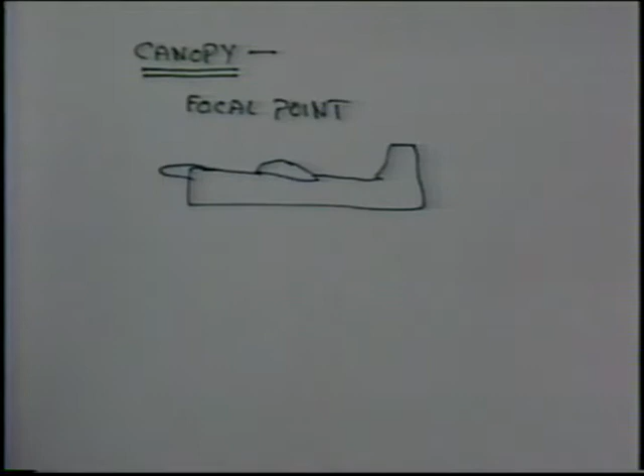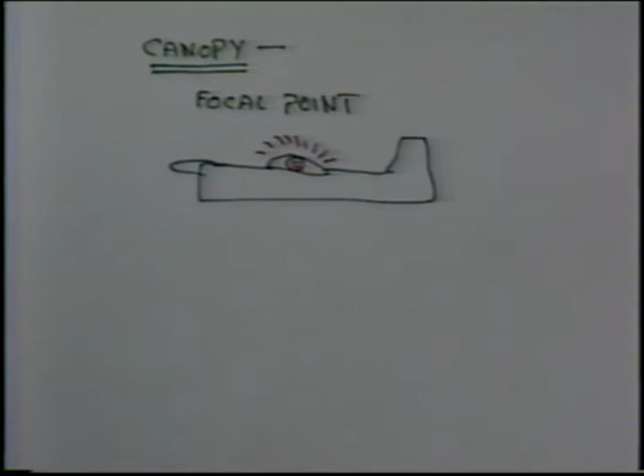What a canopy really is, and this is a very important concept to understand, is a focal point. What generally happens is you have this model, and of course it's the Plebinski special, and somebody goes to look at it, and the first thing they see - they look at your new model, boom, boom, boom, boom. Wow, look at that canopy, look at that pilot, look at that seat or stick or whatever it is. It's always important. It's a focal point.

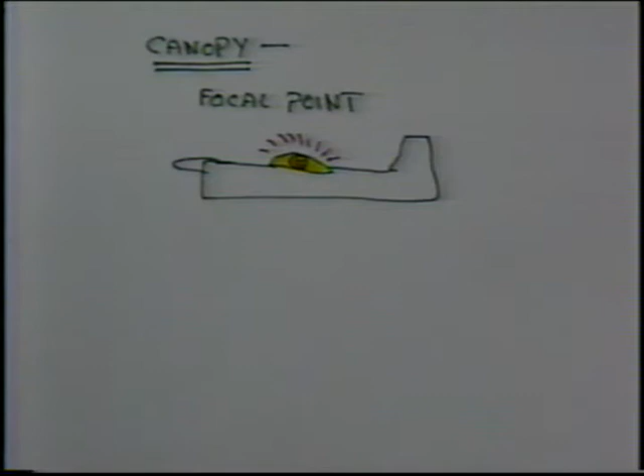Now, if you understand it's a focal point, what that means is you want to put more than the average amount of time and energy and effort into making it look pretty. Sure, there's other things, but a canopy is a focal point.

Now, in the old sweeper days, I'll just make this real rough. One of the things that was always important, at least I always thought was important, was that forward jet canopy. Boy, did that always get people looking and wondering how you did it. But what I always did was I carved off the top block, and of course I didn't have video back then, so I didn't document any of this. But I did mention it in the article I wrote in 1968 - how I got all that canopy detail in there.

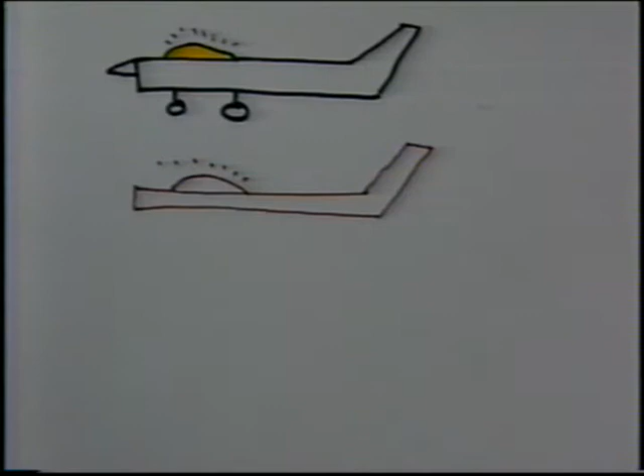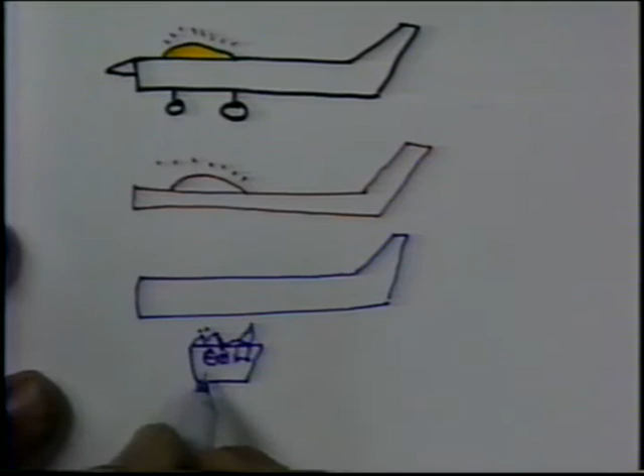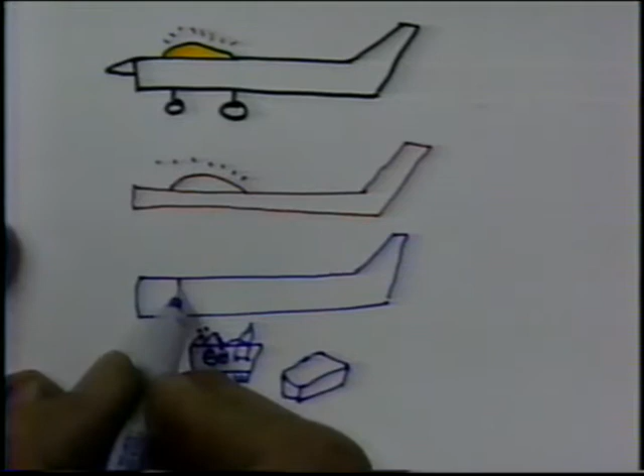To backstep one more step here - I had the top block and the rudder on it, and you've seen that already on this set of videos. What I did is I made the whole canopy in a box. And then I took this little box and I had all the wheels and dials, and a seat was in there, and a stick, and a bird cage, and some naked women, and all kinds of stuff. If you looked at it from the top, it was a little box, just like a little matchbook box. And then what I did, I carefully cut this out, took that box, sunk that box right in, so now it was part of this, and then of course installed the clear plastic part of the canopy.

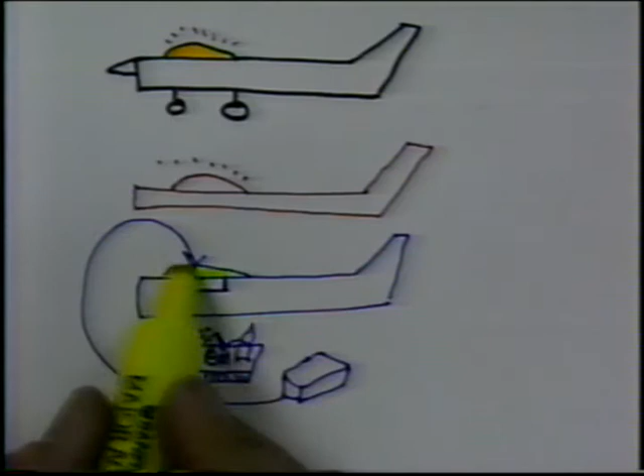Now that's just one way. Obviously there's other ways, but the way I think I'm going to choose to do this is carefully measure out for the box.

If you make this box, you then somewhere down the road will have - and I just want to do this off camera - some amount of instruments, and these are available from a million different sources, whatever the instruments of choice. Tatone makes them, several other companies. It's a good idea if you're not a real pilot, take a look at a real airplane and see just what a dashboard looks like.

There's usually pedals in the bottom. There's usually a stick or a wheel, and a toothpick makes a nice stick or a wheel. The bottom of this, the floor, is always of a non-slip material. In our case, what I used in the Red Baron, is 80 grit red sandpaper for the floor - it's a maroon kind of sandpaper. And there's several other ideas here. You can use the sides, make light ply out of the sides, and put lightening holes in them. That always kind of looks realistic.

A throttle quadrant will usually look something like this, and you can make this out of a piece of 1/8 inch balsa. Have a pinhead sticking up with a throttle on it, and that usually would be on this side. Well, it really doesn't matter - each airplane can be different where it has its instruments and stuff.

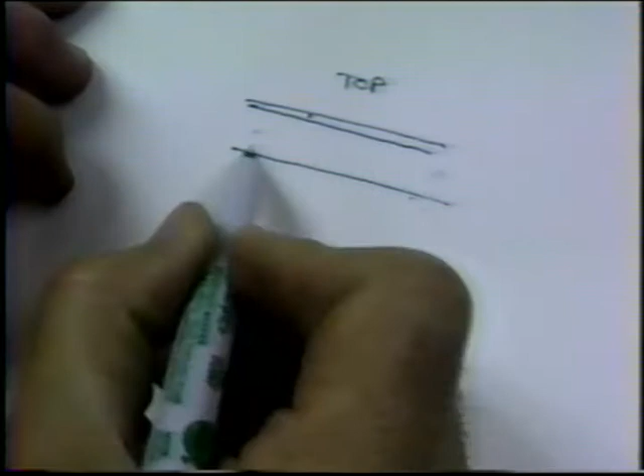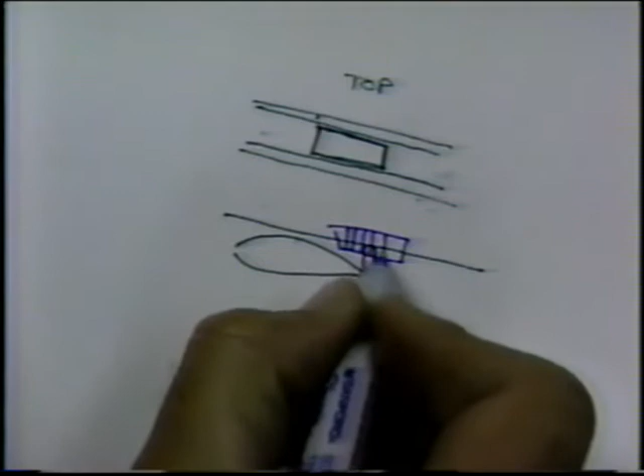Now here's just some of the ways you can get yourself trapped. You want to measure the top, wherever. If this is a forward canopy or rear canopy, measure inside the fuse sides, and you want this box to be a little bit thinner. Make sure if it's a midsection going over the wing, and your horn is here at the fuse side, you don't want to put the canopy down here and then after you put it in the body, the horn or the push rod bonks right into it.

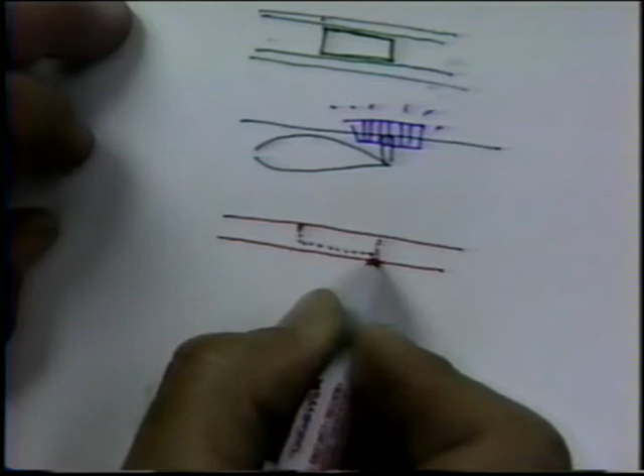So a safe way of doing this, I call it a safe way, is I lay the top block right on the table so that nothing sticks below when it's laying flat. I measure side to side, top to bottom, and get a dimension to make my little box in, and try to get that done ahead of time. So from the top view, it'll appear like this.

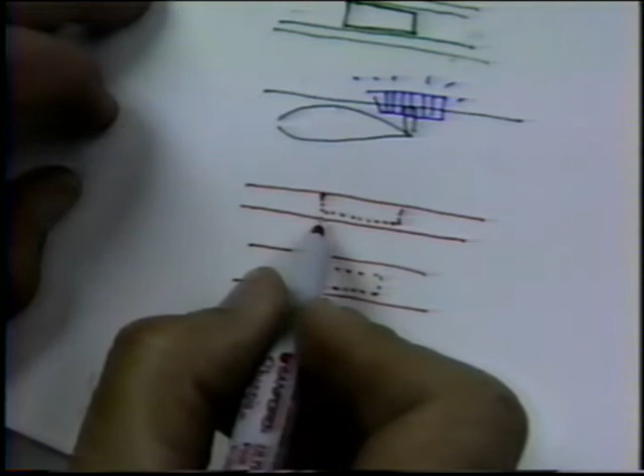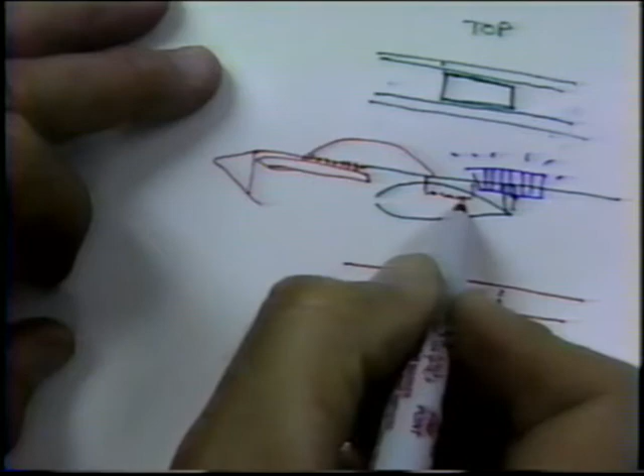From the side view, it doesn't stick down into the airplane, and either it runs into the wing or the horn - and I've made things that ran into the wing. Well, you can't cut the wing out, you can't cut the horn. The only one you're really safe on is if you do a sweeper kind of thing. The motor mounts are up here, and you can use the motor mounts as part of the canopy. The quadrants and stuff can be up here. But back here, you've got to be aware that you could run into the wing or the push rod. In this case, we want to figure this all out ahead of time - it makes it a lot easier if you do all this research ahead of time.

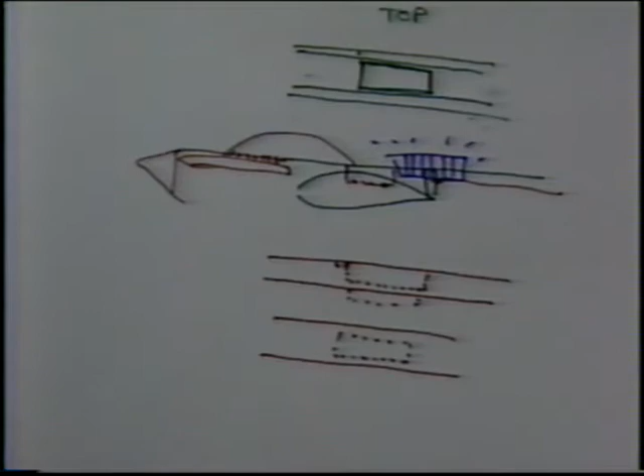The most common problem of people making their first canopy, some kind of bubble canopy, is they make the box either in the plane or off the plane. One of the biggest problems you can have is this whole area can be sealed. The canopy is obviously a sealed unit, and this joint along the fuse is sealed. If you seal this whole thing and make it airtight, what's going to happen? On a cloudy day it's going to get all moisture - you've seen this, it looks like the inside of a beer bottle. It looks terrible, and as it condenses it's going to look even worse. You put it out in the sun, it's going to expand and shrink, expand and shrink.

What I always do - if you leave a hole in the bottom of the canopy, let's say you leave a hole here, well, you're going to have what Paul Walker had one year: all of the dust and chips from inside the plane work their way up, and the pilot's going to look like he's been choking on cocaine.

Now what you really want to have, and this is a well thought out thing, is a hole somewhere so this is not a sealed unit. Down inside the plane, a hole, but covered with a piece of coffee filter. From the bottom view, you have a hole and a penny-sized piece of coffee filter under the seat so that air can get in and air can get out, but it's filtered as it goes in and out.

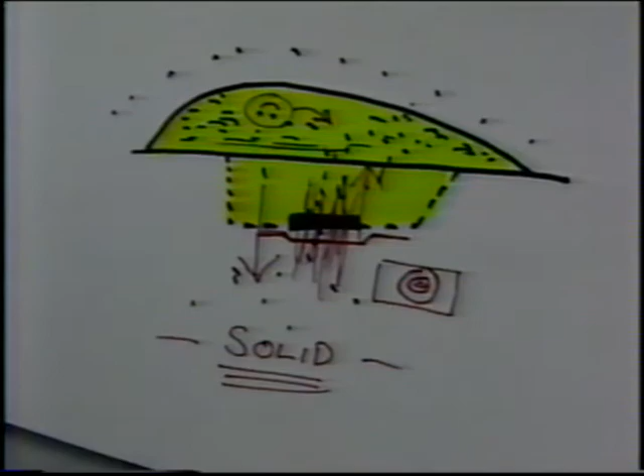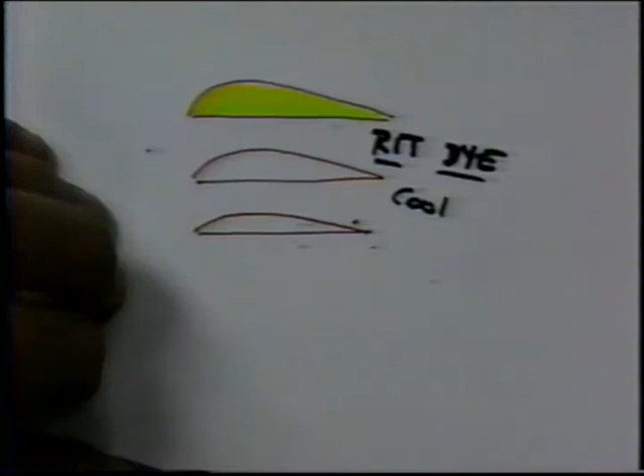Just for your own information, you may order these SIG canopies - they come all different sizes and heights. You get the one that you want, whatever. Now what you may choose to do is tint them - you can make any color of tint. What you do is go and get RIT dye, the ordinary dye that comes in a box, that we dye the hinges with and whatever. Boil the water, let it cool off, maybe for 15-20 minutes - it needs to be a little lower than boiling.

If you boil it, this canopy is going to shrivel up like an old woman's pocketbook. What you want to have is a little lower than boiling.

Dip it in. Now what you do is you have those scraps - you know, the canopy comes on a piece. Take a piece of this scrap, or buy two canopies, and you have this boiling water, a little lower than boiling. Submerge the whole canopy in there. Leave it in for about a minute.

Take it out, it'll be a certain color, whatever color that is. Put it in for another minute, it'll get darker. Almost infinitely, it'll keep getting darker. The problem is, at some point in time, you can't see your canopy details, and it all disappears and you did everything for nothing.

If in doubt, leave it a little lighter than you expect to use. If it's a little bit lighter, it'll always be better than if it's a little bit darker. Lighter is better.

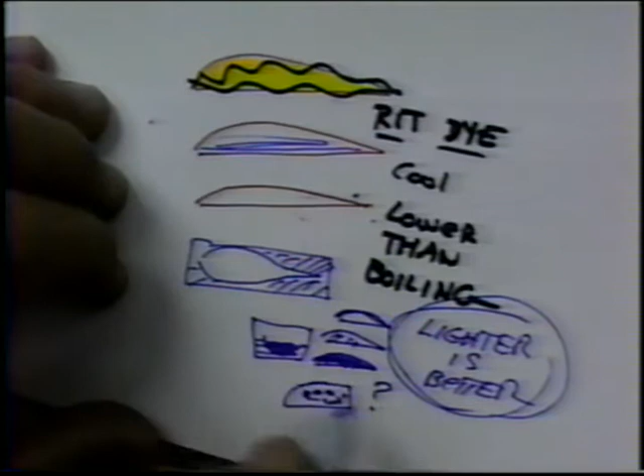And when you take it out in the sun, don't forget you're going to be looking through one side of the canopy and out the other, so it'll automatically be darker than it is when you look through one side. And then you'll still be able to see your instruments.

Dave Midgley has a lot of canopy molds. He has molds for Noblers and different planes that you can't buy the canopy for anymore. If you need a special canopy, give Dave a call. If not, one of the sources is SIG.

And obviously one of the things I did, just for ideas you can use, is Byron. Byron Models makes these big giant scale things. Now what I did is I bought the big giant canopy that belongs on an F-16. This canopy was about - boy, I don't even remember - it was just half the size of the fuselage.

And I cut it down so I only used this top part on my F-16, and then I went and put a lot of details in it. But that canopy was about a 32nd of an inch thick. It really was beautiful, it cut down real nice. But that's another source of canopies, or kits.

Like a chipmunk kit, you can get that canopy that looks like a chipmunk. Whatever that, a Mustang - they have P-51 canopies if you're doing the Warbird kind of a Mustang. Bearcats - they have a Bearcat canopy that's kind of cool.

So if you're going to put all this time and energy into a canopy, you want to research out all these possibilities, so you come up with something that you're really going to impress your friends and neighbors with.

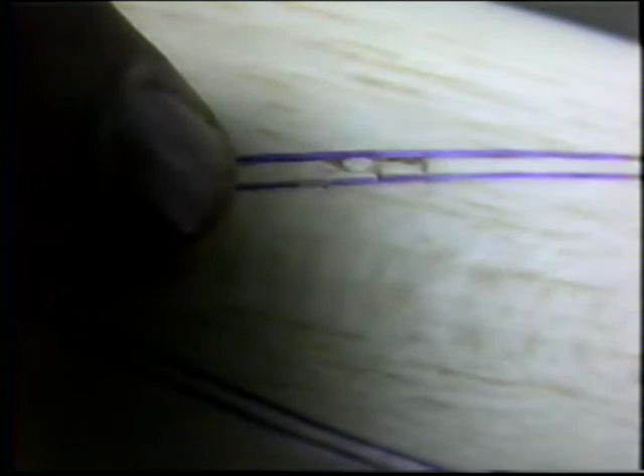Now with that cut, the next trick is I'm just going to cut little notches here and pick out one piece at a time. Cut myself a notch, pick a little piece out. Let me show this on the macro lens. If you just cut a little notch, maybe a quarter of an inch, and pick that piece out, cut a quarter, pick it out, pick it out, and just go right down. A quarter inch piece at a time is just about right, and you'll have a nice ditch when you're finished.

Now with that channel carved, take a piece of 220 sandpaper, fold it up, and be real careful you don't go through. As soon as I finish carving this, I'm going to take the top block off and go underneath to harden up all the wood around this ditch with CA, so that canopy is sitting in nice hardwood. You wouldn't want to do that before you carve. Make sure you have a nice tight fit on the canopy.

You can see a couple of pinhole spots where I've gone through, but it won't be a problem. That's what the captain of the Titanic said, don't worry. Anyway, we will get that nice ditch carved in there, just a couple more swipes.

Now you want to make it big enough because we're going to try to attach this with epoxy. I don't like CA, it leaves a cloudy film on the inside of the canopy. Epoxy doesn't. When it comes time to attach it, that'll be far down the road.

Now you also want to check every step of the way that you're not making a banana out of the block. So lay it down on the table flat, see that you have a decent chance of getting it nice and flat, and that you haven't spread that open or concaved it in.

Not only do you want a permanent joint here, but I really want to have a radius of thick CA here too. I really don't want this getting loosened up. I mean, Gene Schaefer had a pilot that the head came off halfway through a season. Some other embarrassing things can happen. Enough embarrassing things happen in this hobby, you don't have to add any to them.

So I'll put a nice bead of thick CA, then we're going to flip this over and plot out where the actual cavity for the canopy will be. Remember, every step of the way here we want to seal this too. We not only want to have it strong, I don't want to have little holes where dust can get through and all that other nonsense.

And what I want to do is look at the bottom and kind of roll it over and plot where that floor starts and ends. I can just put some light marks here, cut the hole a little bit on the small side and then work it up to the big side.

I know I have the floor from there to there, so I'll kind of cut this on the small side, leave a little bit of extra room around the edge, and then pretty much just connect the dots here. And I'll be ready to start building my box.

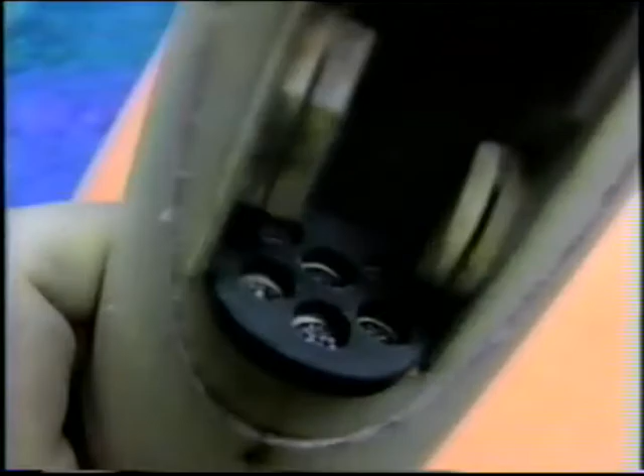But of course, always give this a shot - put the old canopy on and just see how you like it. Yeah, so far so good.

Now there's a lot of materials you can use to make seat belts out of. One thing that seems to work real good is 1200 sandpaper folded over. What I do, I fold it over, get some CA along the edge, get it on there with the Q-tips. That tends to get some dust in there and kick it off. Fold it over. Now this way you have the texture on both sides, and you can just press it down underneath a piece of plywood till it dries.

Now after that kicks off, I trace out the seat roughly 1/8 of an inch thinner than the seat, and I can get the harness belts all in one cut here, all in one piece of paper. Now with the harness and everything ready, this piece you can just fold back and tack glue it in place. That gives you that nice edge right there.

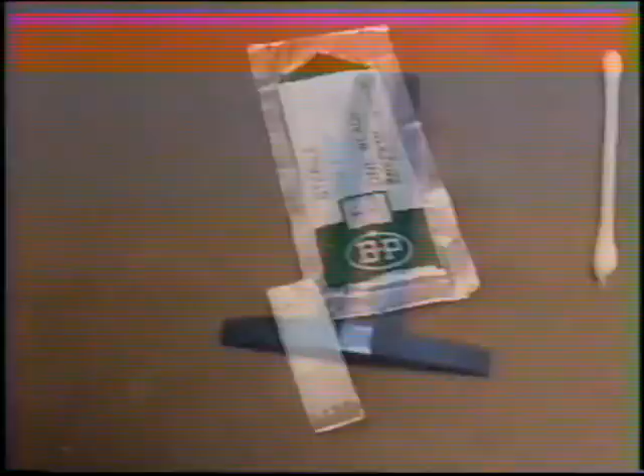See how realistic that looks as a seat belt buckle - it's just a little piece that goes around and around. There's nothing crazy about it. Then in the back, just drop a CA and hold it.

Again, we get this nice variety of texture where we have some shiny stuff and some dull. The seat belt actually is dull - if you were going to use material, you wouldn't want to use shiny material. Everything inside a cockpit is usually dull.

All you do here is lay the material flat on a table, take some Q-tips, and rub it flat. Then cut it into thin strips - the scissor is just perfect for this.

You can see I'm just wrapping this around, and each time you wrap it, it gets a little thicker than the material behind it. It adds another three-dimensional look. What we're trying for is a lot of little three-dimensional things that'll catch your eye - some sparkle, some shine, not everything exactly the same.

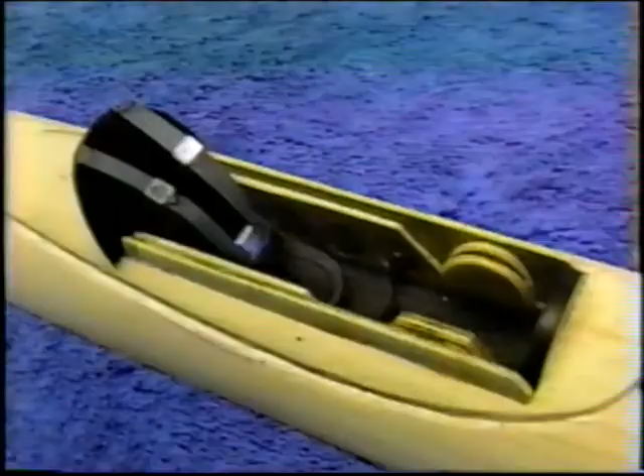This is like a little build-it-yourself kit here. It's always easier to work on these parts when they're not glued in. Once you glue them in, it seems like you need paintbrushes that go around corners and all kinds of crazy stuff.

Okay, with the little stick done, we're going to make the throttle and whatever this is going to be, the flap actuator rods here. We'll do that next.

Now I took a pin and just bent it over here, put a little blob of thick CA on it, and painted it black. That'll be one of my lever arms.

Now what I'm doing is mixing up what I hope is going to be the zinc chromate color of paint. I mix a little white, a little green, and what I'm going to do is try to three-dimensionalize it. In other words, anything further back in the canopy gets painted a little darker, anything further forward a little lighter. I'll also put just a little bit of talcum powder in this mix, just so it'll be a dull finish.

As you go along, you can make some surfaces darker or lighter. Now one thing I have to mention before this video ends, we're near the end: whatever we have left over on this canopy will be picked up. This is an ongoing set of tapes of the building of STREGA, so you may or may not want to watch some of the other tapes.

We hope you get some good information out of these tapes, something you can use on your next plane. My theme for 1995 is there's room in this hobby for everybody. Certainly room for semi-scale planes, pipes, no pipes, smoke pipes, whatever. We all have room, we all have little interesting things we like to do. And man, let's get Al Rabe back in the hobby. That's goal one here. Let's go, man. Get him back. Diversity. How about Walker's B-17? How about some more semi-scale planes? How about some Reno Air Racers? Awesome.